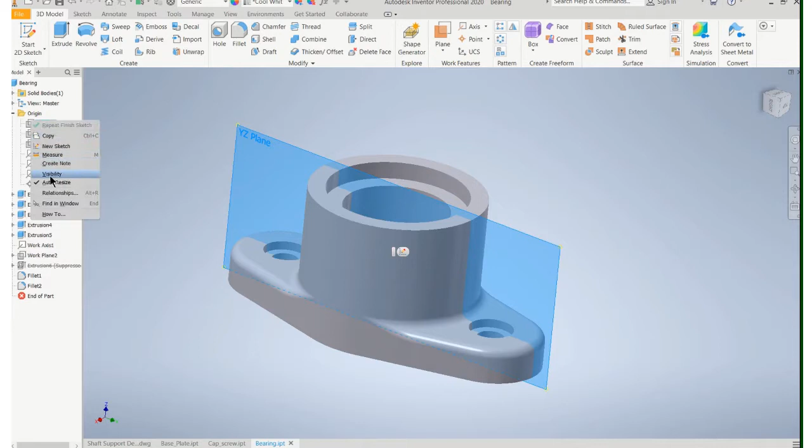If you look at that, you see that plane goes right through the part. So I'm going to take that plane and offset it out to the surface here by using offset plane. And we know the diameter of the outside of that is 2.5, so that's going to make that 1.25 inches. So I'll put a plane out there. I'm just going to right click that one, turn it off. And then I'm going to do a sketch on there, and that's where I'm going to sketch that hole.

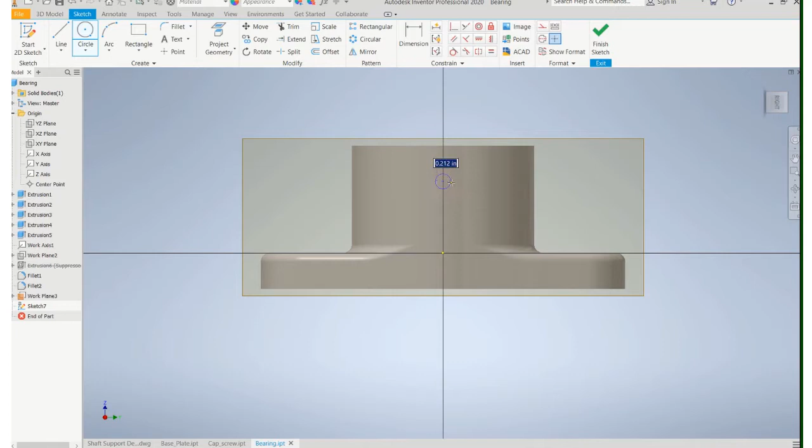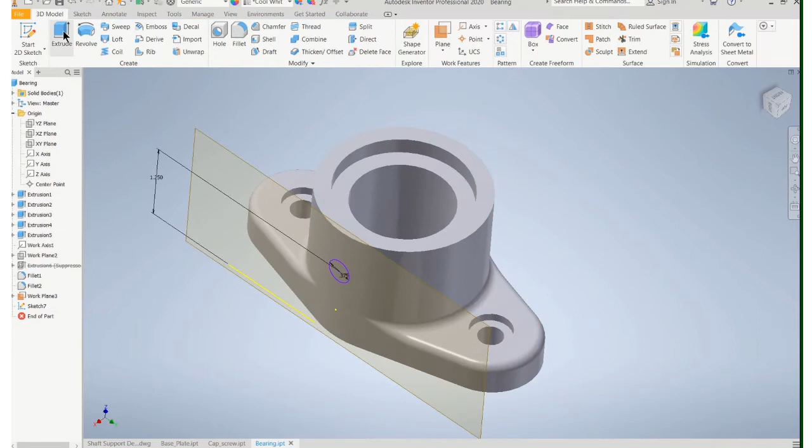So now I have a flat surface to sketch the hole, and it's actually a 3/8 hole. Make sure you dimension it correctly. It's 1.25 inches from the bottom. And then I can just do a cut. And that doesn't go all the way through, it only goes through one side of the part. So that'll allow me to put that hole in the side of the part.

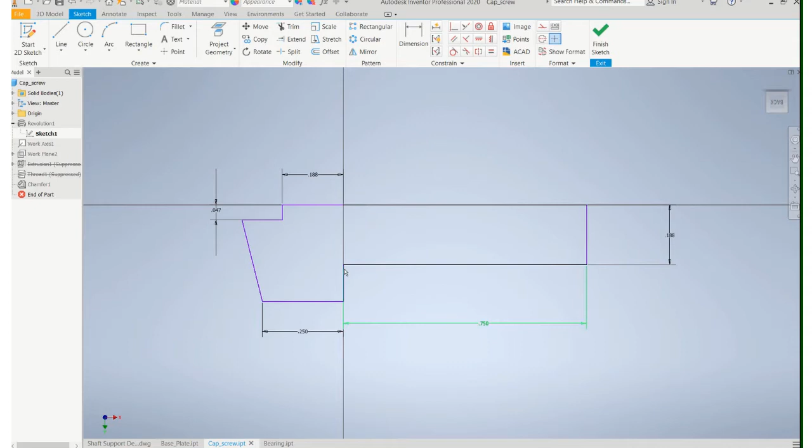So that was one thing. Another thing is this cap screw. If you follow the instructions that they have in the book, let's look at this sketch. And they tell you to do this. I'm going to revolve this. They tell you to put this slot in here. But when you revolve it, all that does is create a little hole in the part. So it doesn't make any sense. That technique for generating that does not make sense using the revolve tool, right?

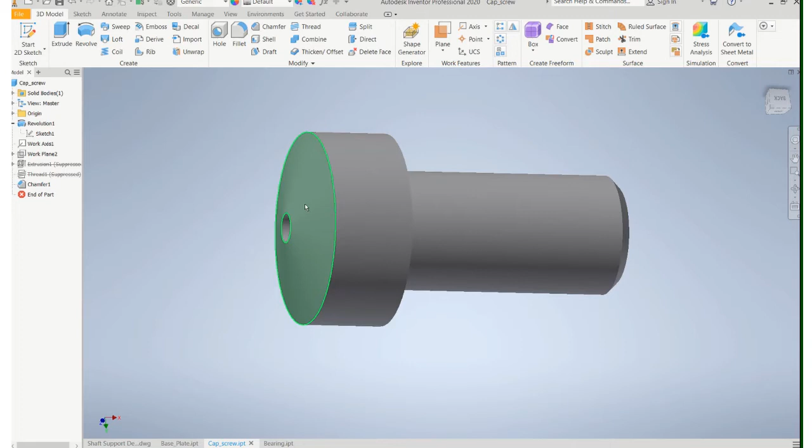So what I did was just cut a slot in. And honestly, this is just a screw. We don't really care that much about the head or anything. So just make something reasonable out of it, and we'll put a slot in it.

So what I did was offset a work plane from this surface. I want to go this way though. That's, what is that? That looks like 5/16. So offset a plane out this way.

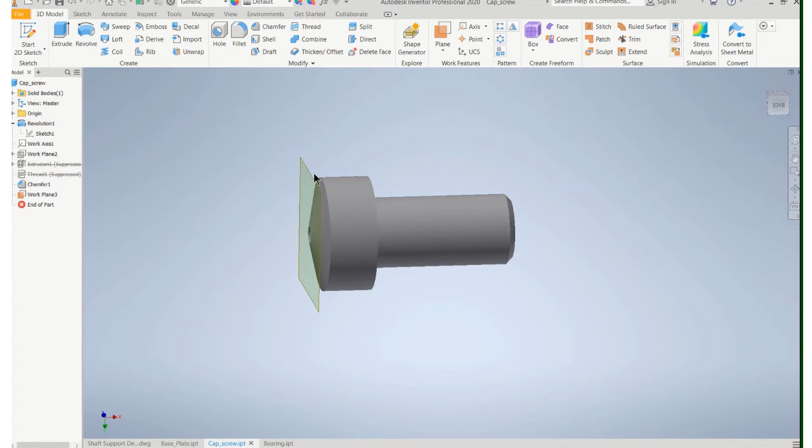And make a new sketch on that plane, and then just draw a rectangle and put some reasonable dimensions on it for the width of the slot. Let's see what I put on it. I don't know what that number is. Again, just something reasonable. It's just a screw. We don't really care. It's just a slotted screw.

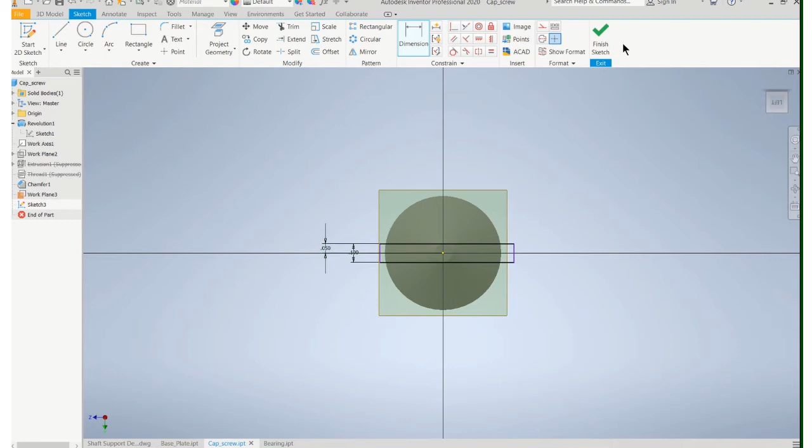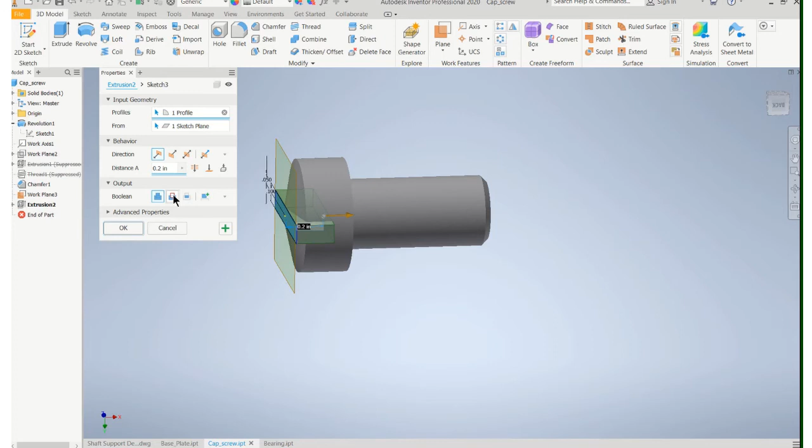And then we'll extrude that into a cut. Now, obviously, we're not going to go all the way through the part, so extrude that down, maybe 0.2. It might be too much. Forgot to make it a cut. That was kind of funny. All right, so there we go. There's our slot. Again, don't put too much time and energy into that, but you cannot generate a screwdriver slot like that by using that revolve tool.

So I can actually delete that hole where I had that hole. I'm not going to keep taking up time, but I'll just go in and delete that sketch part of the sketch where I had that hole in there.

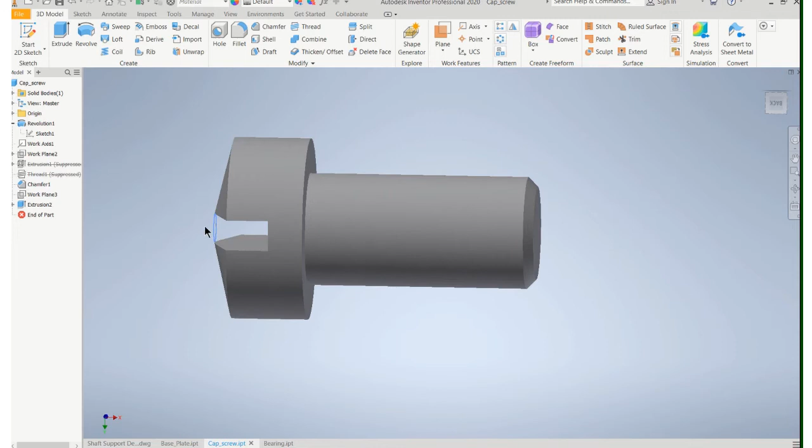The other thing I have to do is add threads. So I've already got the diameter of this set to the correct size. The thread on this was a 3/8. And if you look at the base of the part, it tells you it's a 3/8 24 thread. So go up here to thread and click on that shank of that, and it notices that it's a 3/8, but its default is to a coarse thread, 3/8 16. We have a 3/8 24, and you can see it'll change that.

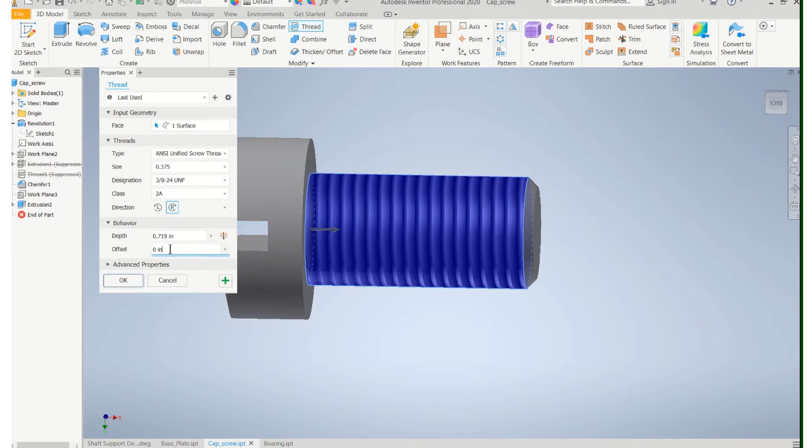And again, it's just kind of like making it look like a thread. It's not an actual thread. And we can put a depth if you want to change how far the thread goes. In this case, let's see, what do I have on there? 0.7. What if we did like a 0.5? Oh, it's in the wrong direction. We have to do an offset. Something like that. Okay, so there's our screw.

So that's perfectly acceptable. Again, we're not going to put too much time and energy into just a screw, but we will want that in our assembly.

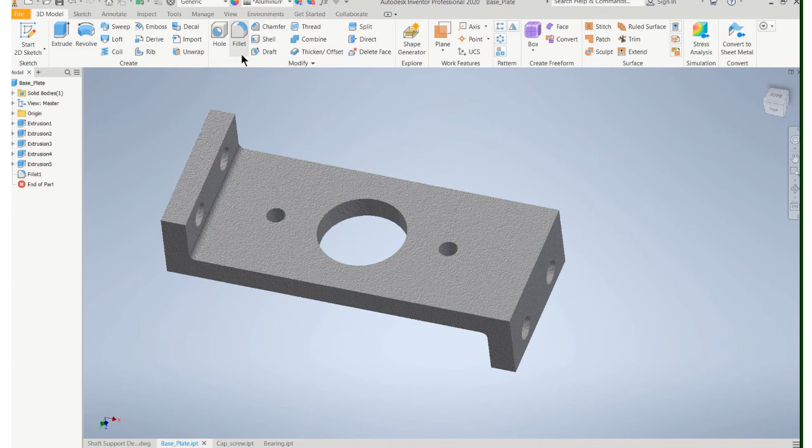Let's see, what else? The base plate. So in the base plate, these holes are also threaded. So I went ahead, when I made the model, I just cut holes in here. Now, I showed you how to use the hole tool, and you can certainly use the hole tool to put a thread on there, but since I already have the holes cut in there, I can just use this thread right here, click on the hole.

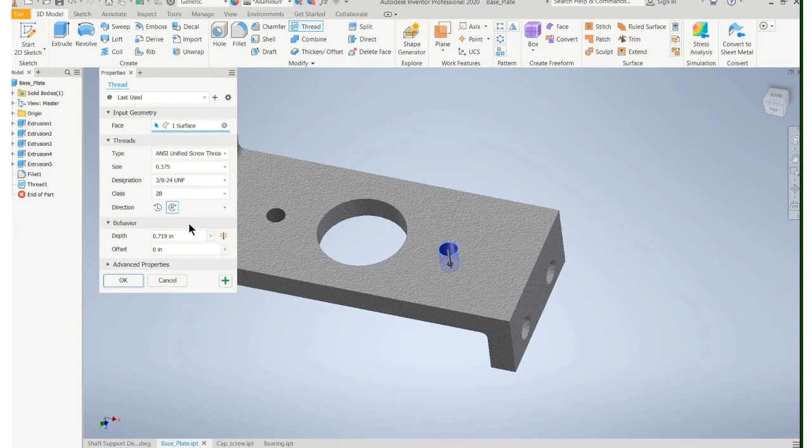It has captured the fact that it's a 3/8 hole, but again this is going to be a 3/8 24, and I've got two holes, so just click on this plus sign and I can click on the other hole. It also is a 3/8 24, say OK, and you'll see you get the appearance that that's a threaded hole. So just some minor little details that you want to take care of in your models, and then those will carry through when you go for your assemblies and also for your detailed drawings.